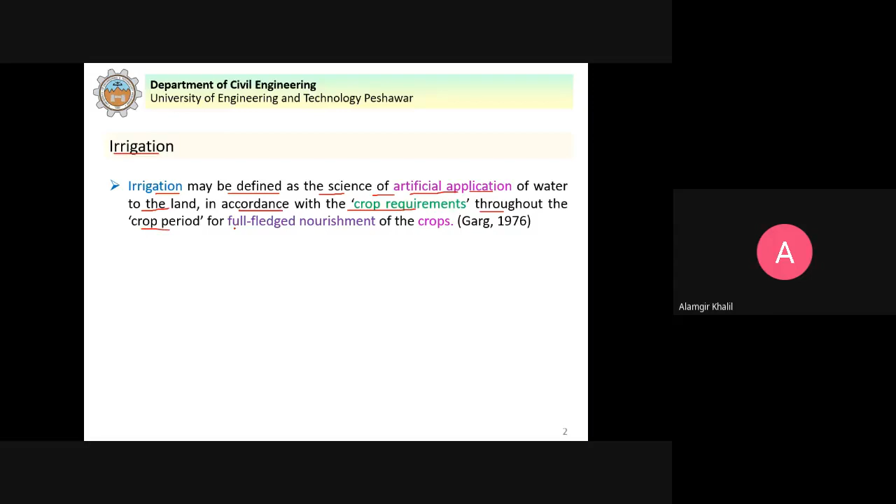Now, irrigation. What is irrigation? Irrigation may be defined as the science of artificial application of water to the land in accordance with the crop requirements throughout the crop period for full-fledged nourishment of the crops. As I said before, the natural way to supply water to crops is rainfall. But since rainfall is variable and plants require a certain amount of water at fixed intervals, it's very difficult for these conditions to be fulfilled by natural rainfall. Consequently, we have to artificially supply water to crops during the crop period. So irrigation is the science of artificial application of water to the land in accordance with the crop requirements throughout the crop period for full-fledged nourishment of the crops. It means we have to artificially supply water in accordance with crop requirements. When the crop needs water, we have to supply it, and this continues throughout the crop period.

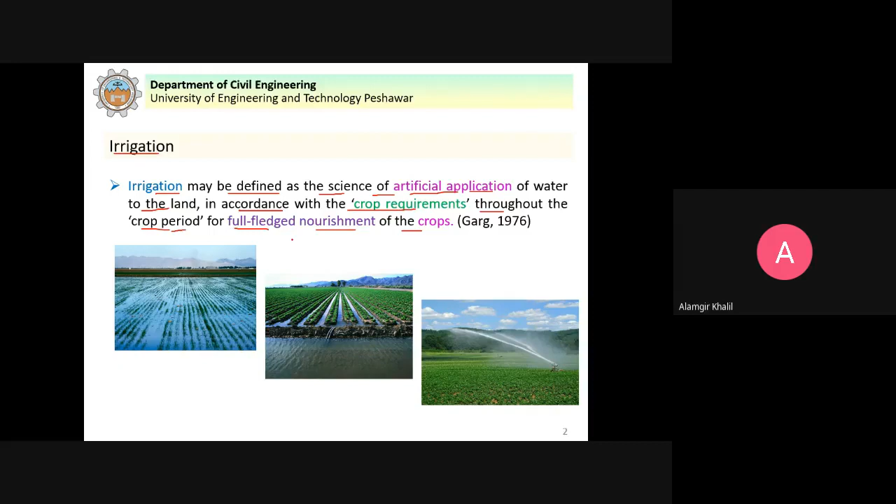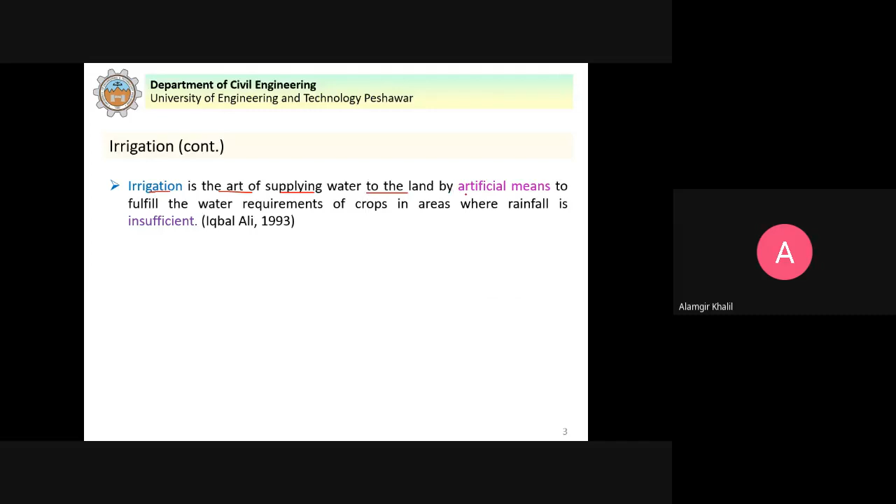So this is irrigation. Irrigation is the art of supplying water to the land by artificial means to fulfill the water requirements of crops in areas where rainfall is insufficient. Where rainfall is not sufficient to fully meet the crop water requirements, we have to artificially supply water to the land to fulfill the water requirements of crops.

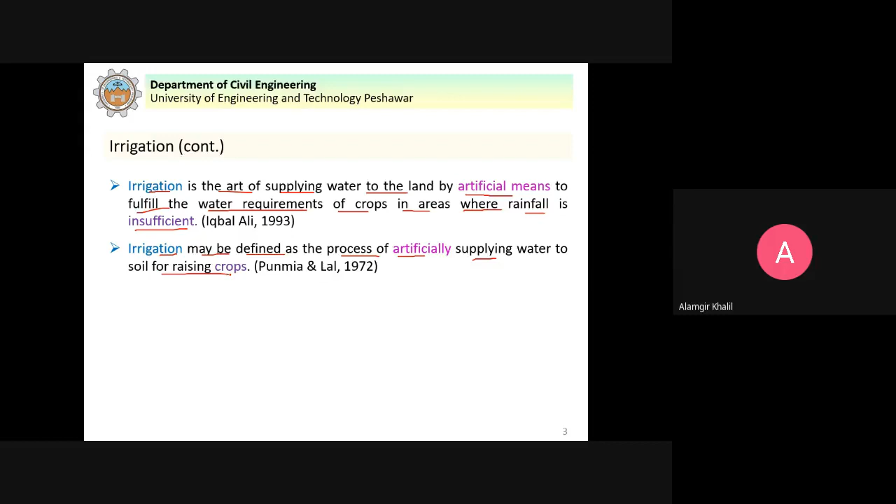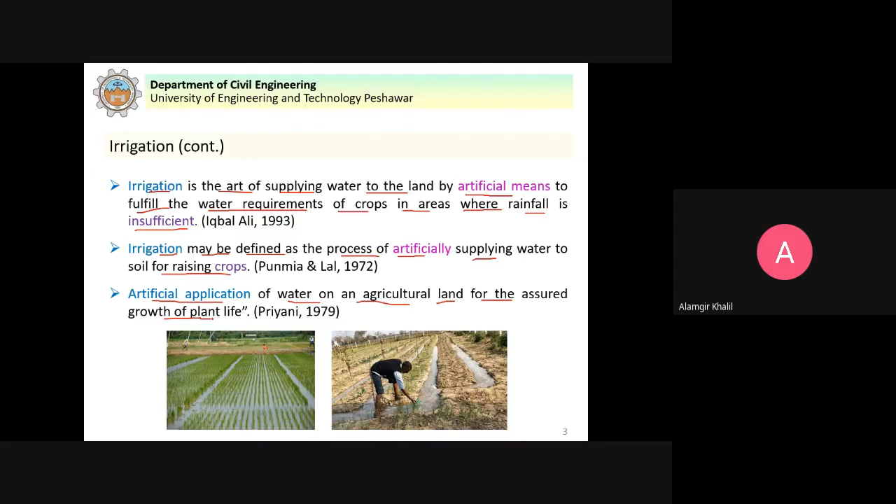Another definition: irrigation may be defined as the process of artificially supplying water to soil for raising crops. Irrigation is the artificial application of water on an agricultural land for the assured growth of plant life. So you can see that the summary of all these definitions is that irrigation is the artificial application of water during the crop period to fulfill the crop water requirements.

What is irrigation engineering? The science of planning and designing a water supply system to the plants and crops for their normal growth during the period of no rainfall, with the help of dam, weir, barrage, reservoir and canal system with headworks, cross drainage works, and miscellaneous works of canal like canal falls, is called irrigation engineering.

So irrigation engineering is the science of planning and designing a water supply system to the crops, to the agriculture land. And that includes all the hydraulic structures.

You can see that with the help of dam, weir, barrage, reservoir, and the canal system with headworks, cross drainage works - which we discussed, if we construct a canal and it has to carry water and it crosses a natural drain or stream, how does it have to cross? Should the canal be taken above the drain, in case of an aqueduct, or below, in case of a siphon? These are known as cross drainage works, and miscellaneous works of canal like canal falls. When there is a drop in elevation of the natural ground surface, we have to provide canal falls. This is known as irrigation engineering.

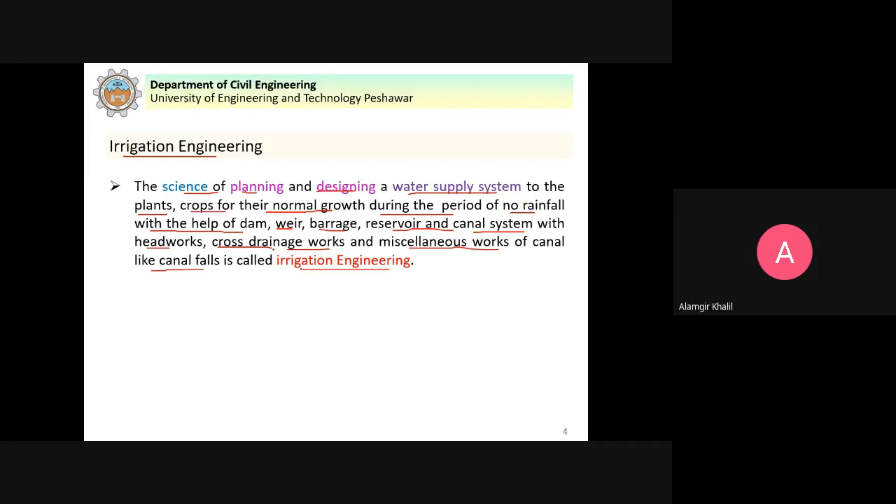Irrigation engineering is the analysis and design of systems that optimally supply the right amount of water to the soil at the right time to meet the needs of the plant system.

Irrigation engineer: an irrigation engineer is the one who helps to bring irrigation water from the source of supply to an agricultural land. So the irrigation engineer is the one who helps to bring this water from the source to the agriculture field, to the agricultural land. That is an irrigation engineer.

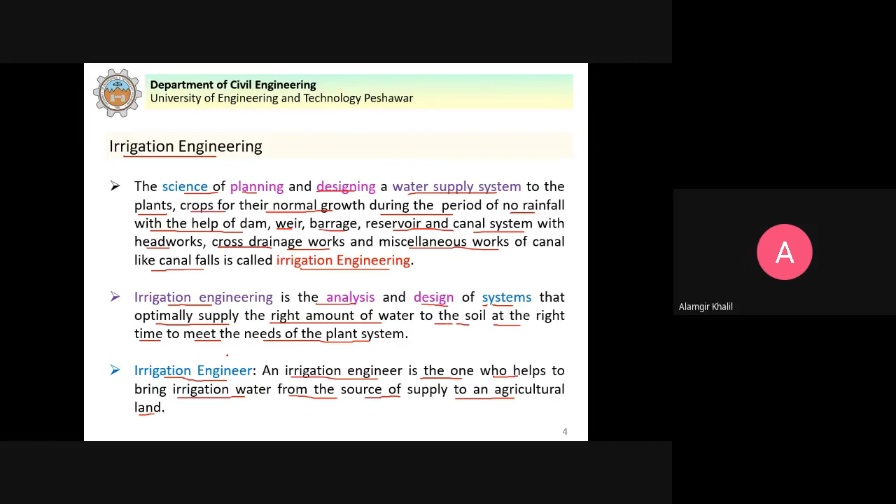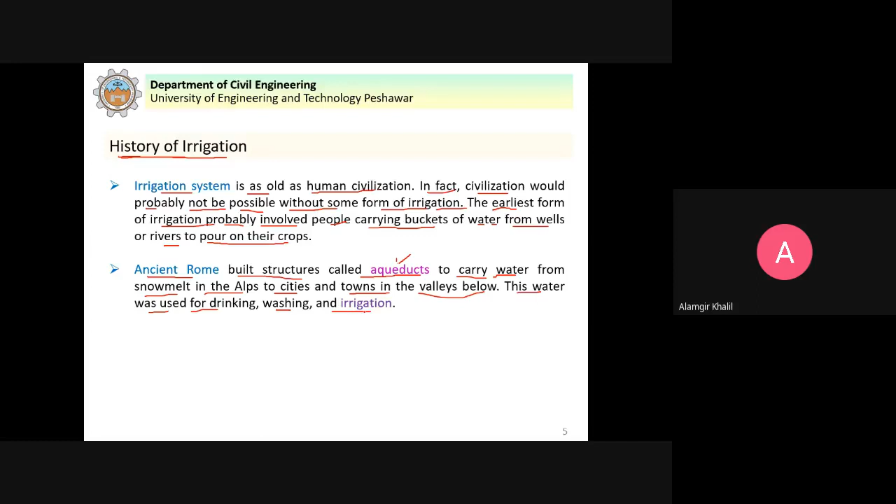Ancient Rome built aqueducts to supply water to agricultural lands, in addition to using the same water for drinking and other purposes.

The Chinese are known to have practiced irrigation since 2600 BC. The earliest work in China relates to the development of the delta lands and the Yellow River. The 1130-kilometer long Imperial Canal, also called the Grand Canal, built in 700 AD for irrigation and navigation, is one of the greatest ancient irrigation works.

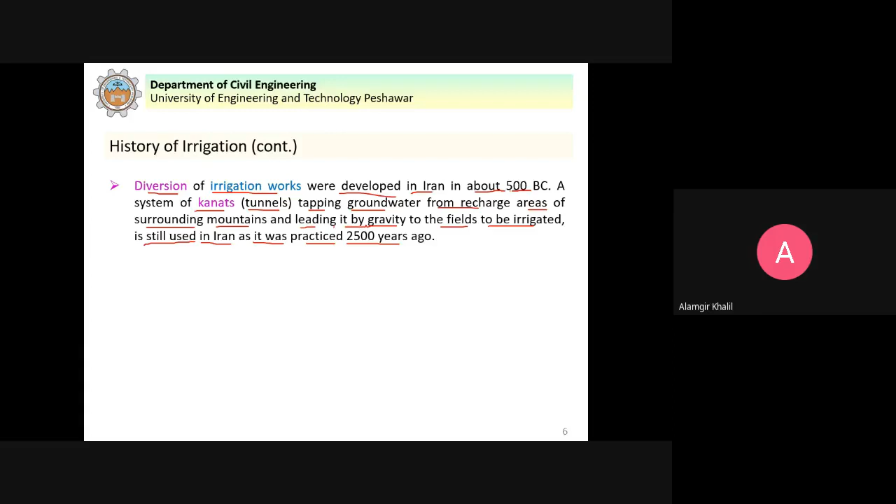Diversion irrigation works were developed in Iran around 500 BC. A system of kanats, tunnels, tapping groundwater from recharge areas of surrounding mountains, leading it by gravity to the fields to be irrigated, is still used in Iran as it was practiced 2500 years ago.

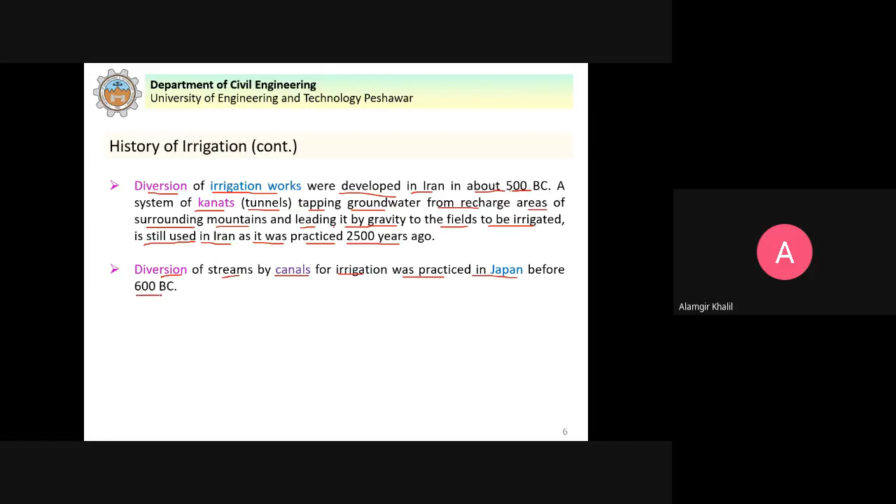Diversion of streams by canals for irrigation was practiced in Japan before 600 BC. Irrigation by diversion works and direct flooding by rivers is known to have been extensively practiced in Thailand, Philippines, and Indonesia, diverting water through a system of canals and then irrigating the lands.

The ruins of Mohenjo-daro and Harappa, Indus Valley civilizations, have also shown proof of the use of water for water supply and irrigation. So in different parts of the world, this artificial application of water to agricultural lands has been practiced since a long time.

Irrigation engineering consists of four phases. The first phase is storage or diversion. In this phase, we have to determine whether we need to construct a dam, or divert the water directly through a canal from the river, that is diversion.

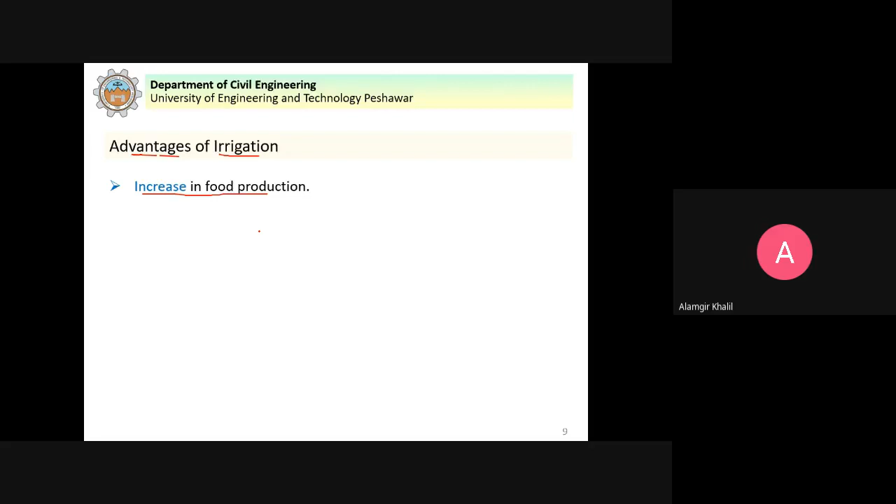Cultivation of cash crops. Cash crops, for example, we have cotton that earns cash for us. When we grow cotton, we do not eat it, but we sell it. So these are known as cash crops. This is possible with the help of irrigation - cultivation of cash crops.

Generation of hydroelectric power. When we construct a dam to store water, the main purpose is to supply water for agriculture, but at the same time we can also generate electricity. So this is a benefit of irrigation.

Also, it is possible to construct a run-of-the-river hydroelectric power project. For example, I give you the case of the Ghazi Barotha hydropower project, which is just a channel that runs from Ghazi to Barotha, where a head is available, and we are utilizing that head of water to generate electricity, and the water can flow downstream and be supplied for agriculture purposes. So this is also an advantage of irrigation.

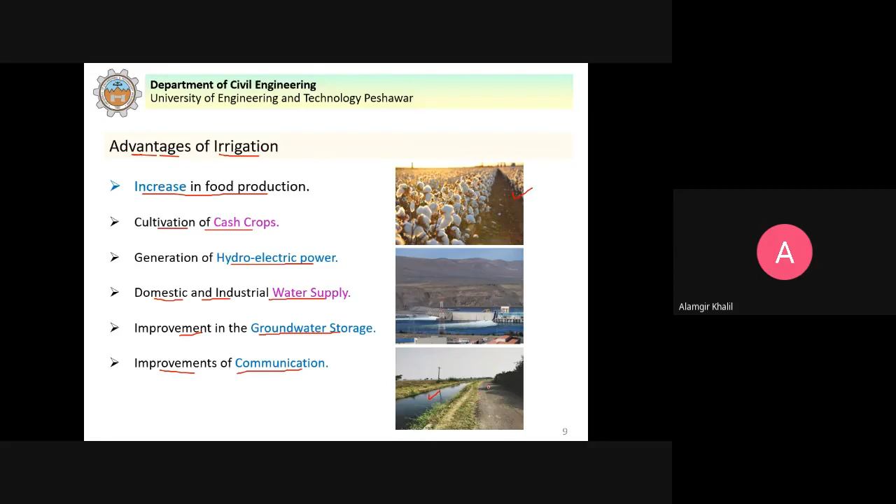Improvements of communication. When we construct the canals, at the sides of canals we also commonly provide roads, as you can see here. So this results in improvements of communication in that area. So these are the advantages of irrigation.

We also have some disadvantages of irrigation. The first thing is raising of the water table, that is water logging. Because of irrigation, the water table can rise, and if it reaches the root zone or intersects the ground surface, then land productivity will be negatively affected, and we cannot grow crops on that land. This is known as water logging.

As I gave you the example last time of the Tarbela Dam, when we constructed the Tarbela Dam, the seepage from the reservoir raised the water table in the adjoining areas, and it caused this water logging in the surrounding areas. So this is a disadvantage of irrigation.

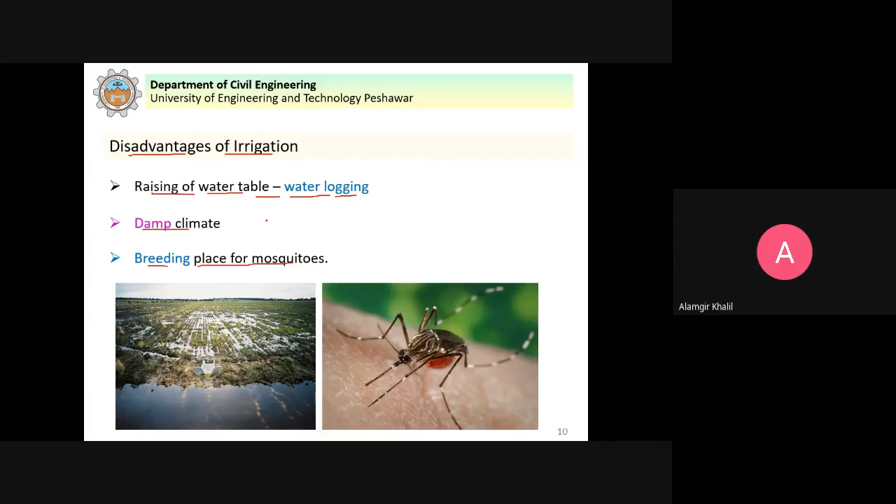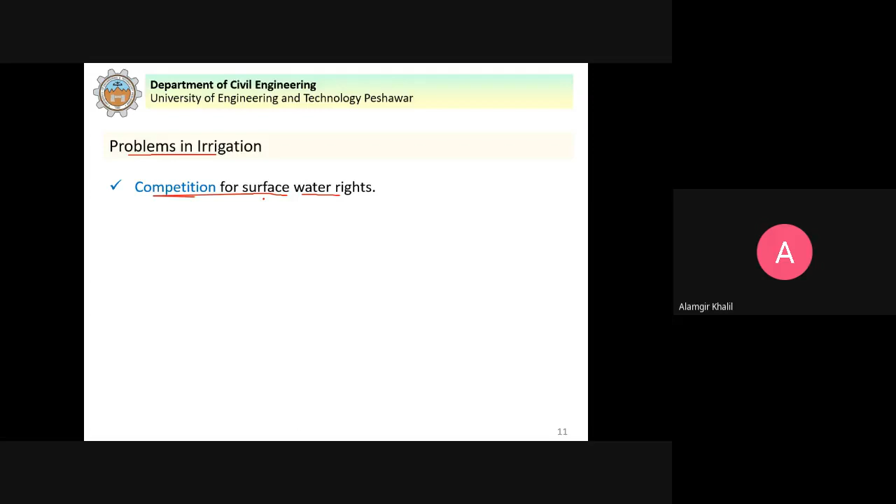Now, other issues that are associated with irrigation: the first one is competition for surface water rights. It means that the water we are using for irrigation may not be available for domestic and industrial water supply. So this can result in competition for surface water rights. The water which we use for domestic purposes, for industrial purposes, may not be available for agriculture purposes. So you can see that there is a competition between these different fields for use of water.

The second issue is depletion of underground aquifers. As we discussed in the previous lecture, in Punjab the groundwater is pumped and is used for irrigation purposes. So if the recharge of the groundwater is less than the discharge of the groundwater, then this can result in depletion of underground aquifers. These underground aquifers provide an important source of water. So because we are extensively using the water for agriculture purposes, this can result in depletion of underground aquifers.

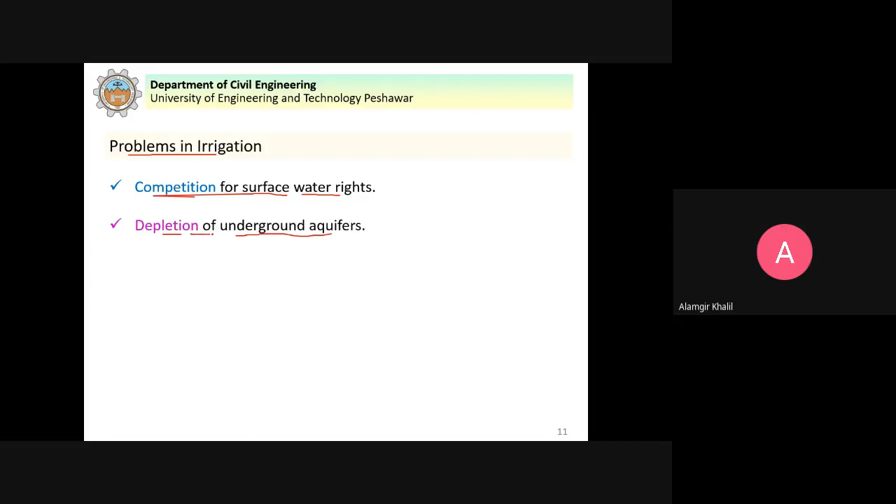Build-up of toxic salts on the soil surface in areas of high evaporation. Now the irrigation water moves on the surface of the land, and the soil contains different salts, and these salts are dissolved in the water. And if in an area we have very high evaporation, the water will quickly evaporate, leaving these salts behind on the soil surface, which are not beneficial for the crops.

Over-irrigation, because of poor distribution uniformity or management of wastewater and chemicals, may lead to water pollution. If we supply more water, what will happen? On agricultural land we apply fertilizers and pesticides, so these are mixed with water and then taken up by the crops. But if we have over-irrigation, meaning more water is supplied, and the same water drains into a natural stream, then definitely it will cause water pollution.

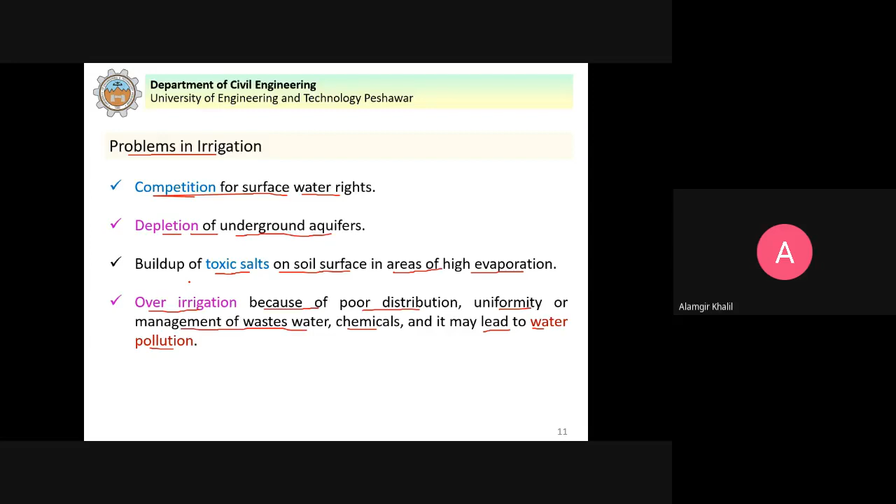Next, we have the areal distribution of rainfall in Pakistan. You can see here the arid zone, where average annual rainfall is 10 inches. The arid zone covers 67% of the land of Pakistan. And another 24% of the land of Pakistan is classified as semi-arid, where the average annual rainfall varies from 10 to 20 inches. So you can see here that about 91% of the land of Pakistan is classified as semi-arid to arid land.

So you can see here why we need irrigation. And this is the reason why Pakistan has the largest continuous surface irrigation system in the world, because 91% of the area of Pakistan is semi-arid to arid. 5.5% is humid, with 20 to 30 inches average annual rainfall, and in 3.5% average annual rainfall is 30 inches. So you can see the scope of irrigation in Pakistan and irrigation engineering. That is why we have an irrigation department in every province, and in KPK we have a Minister for Irrigation.

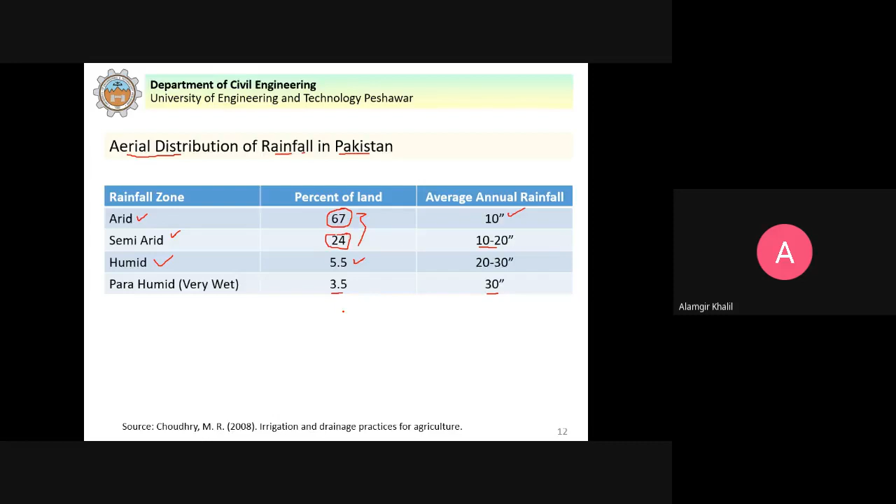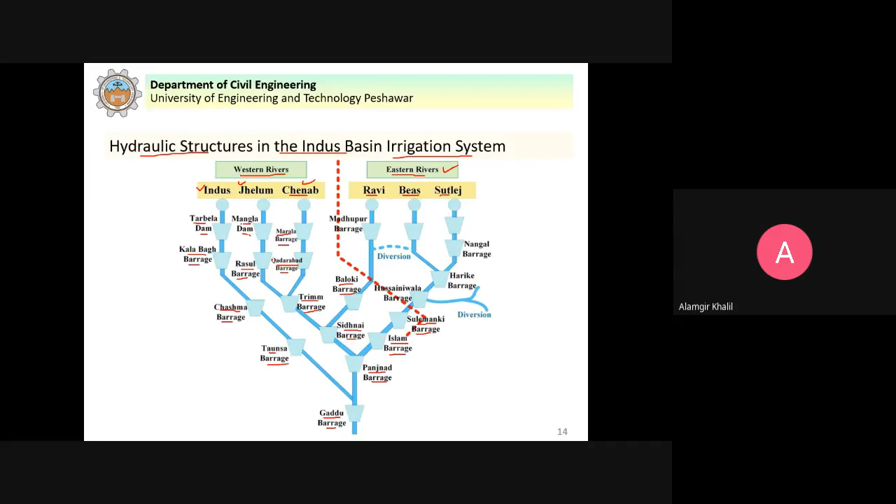Indus Basin irrigation system that we have in Pakistan, you can see here the rivers, Indus River and its tributaries. So in this figure, you can see how we have developed agriculture along the banks of these rivers, and the areas between the rivers. You can see here that this area in KPK, this is the northwest mixed cropping. Different types of crops are grown here.

Similarly, here you can see this yellow color, this is Punjab mixed cropping. The light green color which you can see here, that is Punjab sugarcane wheat. This light blue color at this point here, this is Punjab rice, wheat. Then the dark green color you can see here, that is Punjab cotton, wheat. The purple color which you can see in Sindh, that is the Sindh cotton, wheat. And the dark yellow or brownish color you can see Sindh rice, wheat.

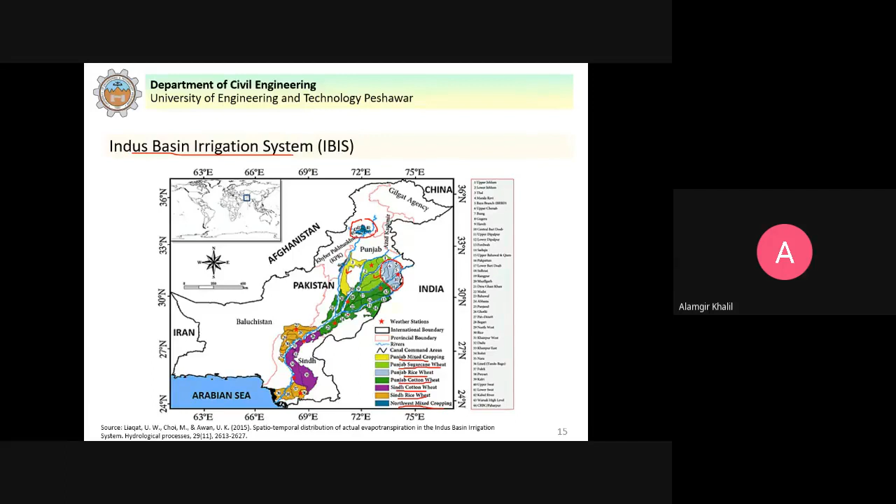You can study this paper in detail. So this is how, because of the Indus Basin irrigation system, we have this agriculture, that we supply the water from these rivers. This is the land use in Pakistan. You can see here the shaded green portion. This is area under irrigation. The combination of white and blue color is area that can be brought under irrigation. You can see here this area can be additionally brought under irrigation. So we can increase the food production. Pakistan can become self-sufficient in food, and we can export and earn the foreign exchange.

So the geographical area, that is 196 million acres. Now area suitable for agriculture, that is 77.1 million acres. Cultivated area, that is irrigated plus the rain-fed Barani, that is 54.5 million acres. Now area under irrigation by all sources, that is 44.5 million acres. Additional area that can be brought under irrigated agriculture, that is 22.6 million acres.

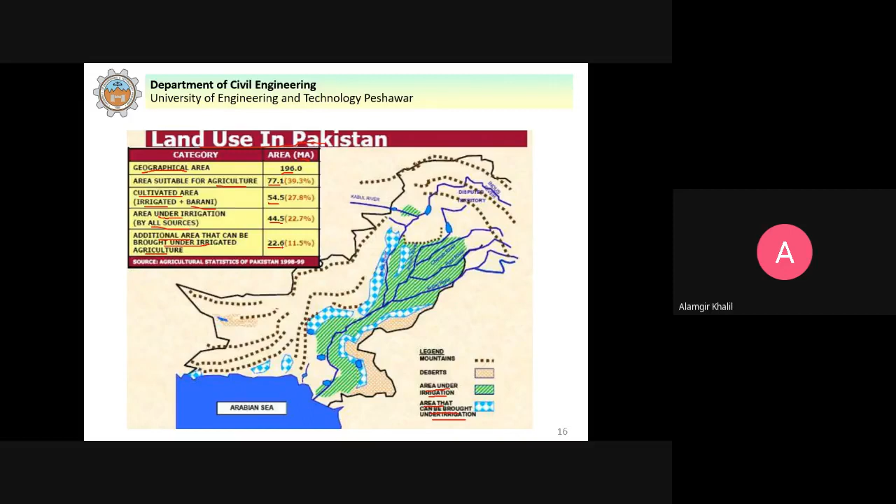Next, we discuss the Indus Basin irrigation system. Pakistan's Indus Basin irrigation system is the largest contiguous gravity flow irrigation system that serves the Indus River and its tributaries, namely Jhelum, Chenab, Ravi, and Sutlej rivers. So the Indus Basin irrigation system that we have in Pakistan is the largest continuous surface water irrigation system in the world.

It consists of 3 major storage reservoirs, 19 barrages, 2 headworks, 2 siphons across major rivers, and 12 link canals. When we supply water from one river to another river, that is done by construction of a canal that is known as a link canal.

44 independent canal commands means that these canals supply water independently to different areas. 44 independent canal commands: 23 in Punjab, 14 in Sindh, 5 in KPK, and 2 in Balochistan.

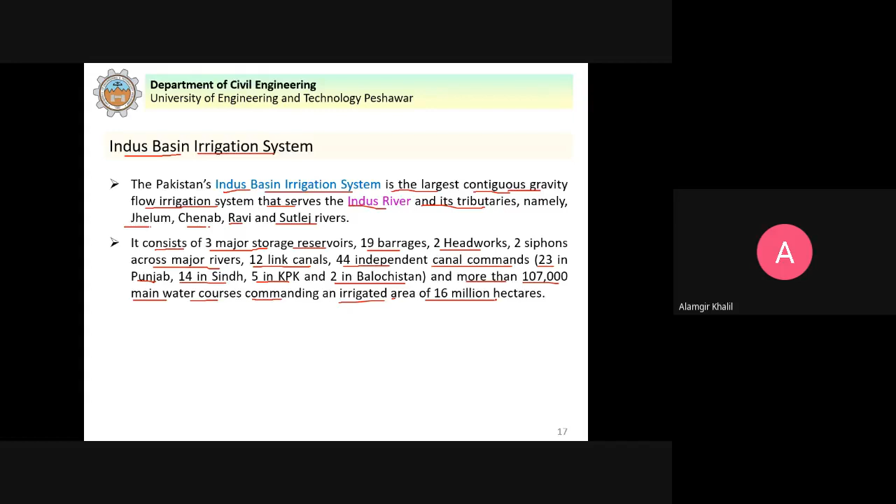And more than 107,000 main water courses commanding an irrigated area of 16 million hectares. 1 hectare is equal to 10 power 4 square meters. 16 million hectares.

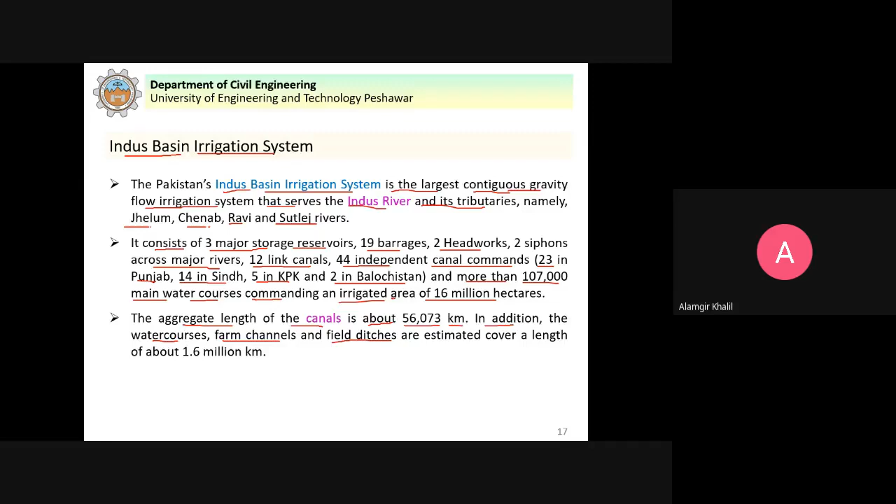The aggregate length of the canals is about 56,073 kilometers. The total canals that we have, if you add up their length, that is about 56,073 kilometers. In addition, the water courses, farm channels, and field ditches, the narrow channels that supply water to the farmers, are estimated to cover a length of about 1.6 million kilometers.

The irrigation system of Pakistan further utilizes over 41.6 million acre feet of groundwater pumped through more than 700,000 public and private tube wells. So in addition to the surface water that we are using, the Indus River and its tributaries, the irrigation system of Pakistan additionally utilizes over 41.6 million acre feet of groundwater.

So that is pumped through more than 700,000 public and private tube wells. It means that we are supplementing the canal water with the groundwater.

The total geographical area of Pakistan is 709.11 million hectares. Out of this, only 34 million hectares is suitable for agricultural production, while only 20.1 million hectares is practically cultivated. You can see here the potential of irrigation engineering that will serve to develop the additional area that can be cultivated.

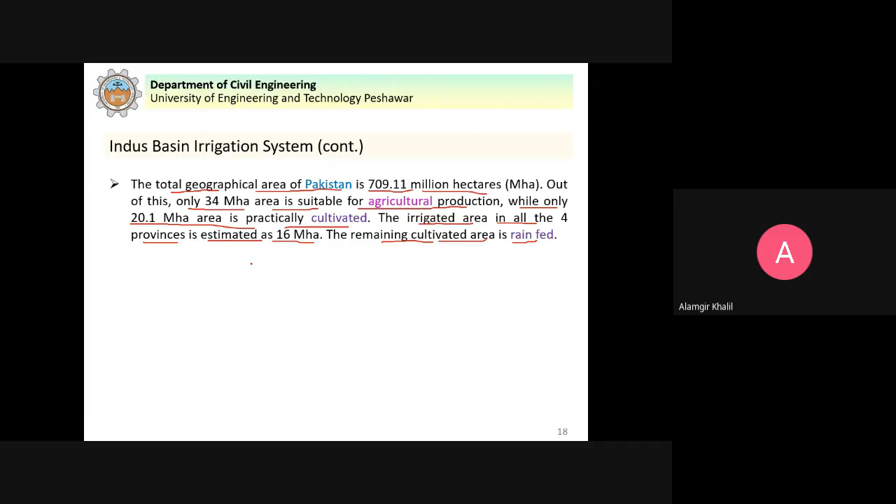The Indus Basin river system makes a prime source of water for Pakistan's agriculture, which provides an income source to about 75% of the country's population. So you can see that about 75% of the population of Pakistan is linked with agriculture, and it contributes about 25% to the GDP, gross domestic product of the country. So the contribution to the GDP of Pakistan is 25%.

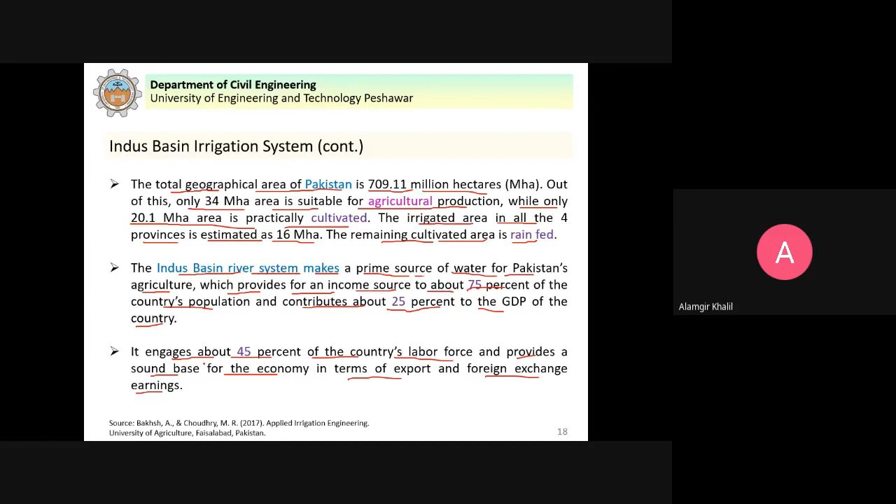It engages about 45% of the country's labor force and provides a sound base for the economy in terms of export and foreign exchange earnings. So this is very important because the cotton that we grow, these all play an important role in terms of export and earning foreign exchange.

So all these figures that I present here are taken from this book, Applied Irrigation Engineering, published by the University of Agriculture, Faisalabad in 2017.